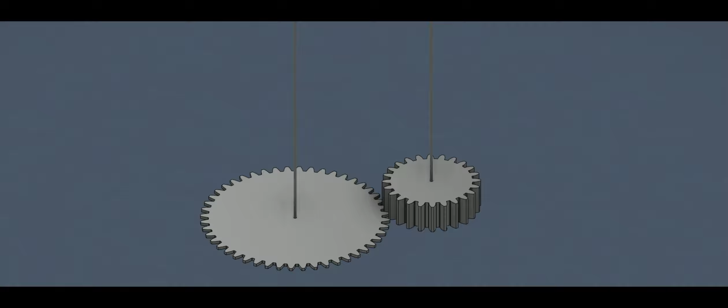Because of their straight teeth, spur gears are some of the easiest gears to model and manufacture. They're great for learning about gears. They're the cheapest gear to produce, they work really well at low speeds, and they're beginner friendly. But the way their teeth are designed makes it easy for them to slip and lose grip with each other. When they reach really high speeds, they get really noisy and start vibrating.

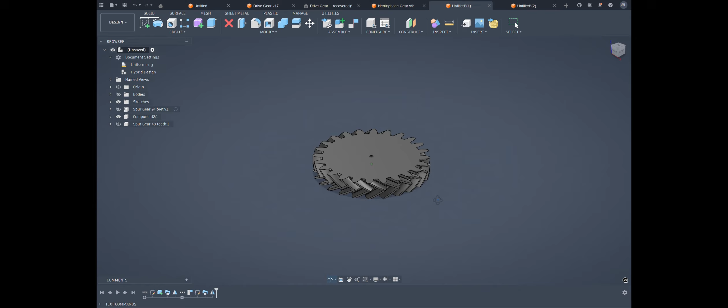An upgrade to the spur gear is the herringbone gear, which is basically two helical gears mirroring each other. Their teeth engage gradually, so they operate really smooth. They have a really high load capacity, and because of their V shape, that prevents the teeth of these gears from sliding out of each other's grip. But they're a little bit more advanced to design.

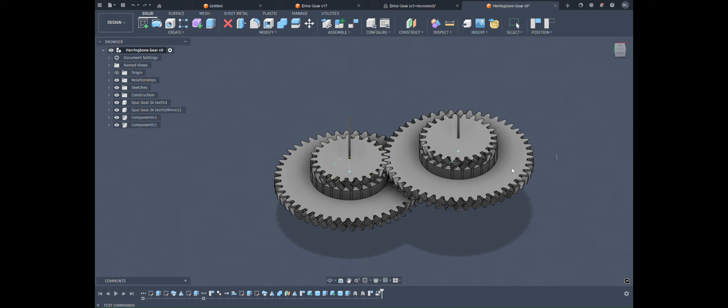In this video, we'll modify the spur gear and turn it into a herringbone gear, making it more efficient and better to use in a hand-cranked phone charger. We'll also add some spacing to prevent the gears from rubbing against each other.

Let's start by creating a new hybrid design and then adding a spur gear. As you can see, I've already added the spur gear command to the Create panel in the Solid tab of the Design workspace. But if you haven't, click Utilities, Add-ins, Scripts and Add-ins, and hit the play button next to spur gear. Leave all the settings as is. We're about to create a spur gear with 24 teeth.

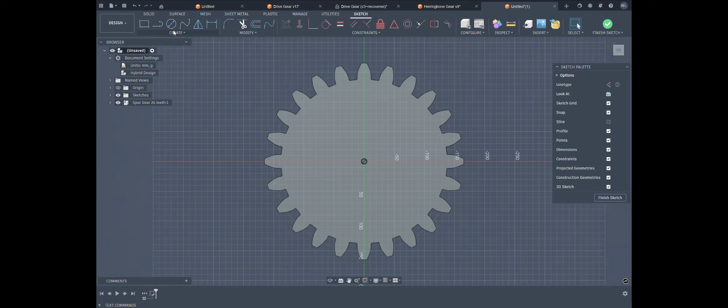Next, create a sketch on the top surface of the gear. Making sure that 3D sketch is checked, select the line tool, and from the center of the gear, draw a line that goes up vertically, perpendicular to the surface of the gear. I'm setting the length of this line to 25 millimeters. We'll use this line later for the sweep tool.

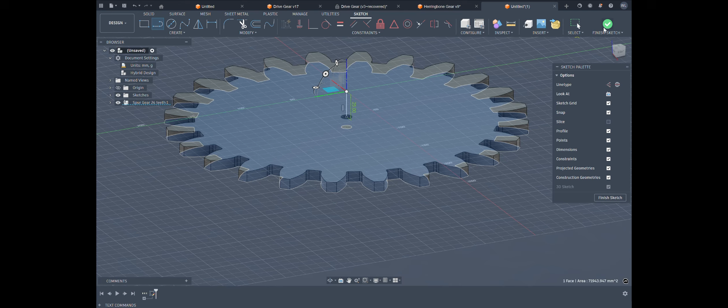You can now click Finish Sketch and make the spur gear component invisible. We don't need it anymore. We only needed it to create the outline profile for the spur gear, which got generated when we created a sketch on the top surface.

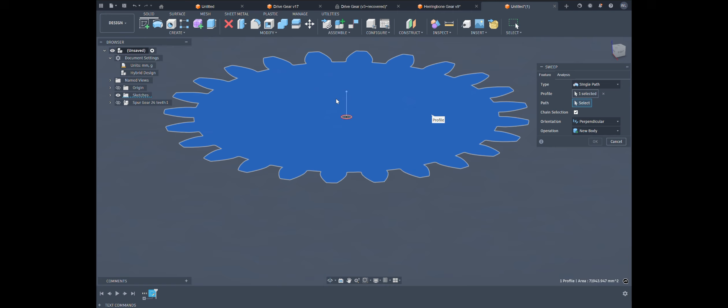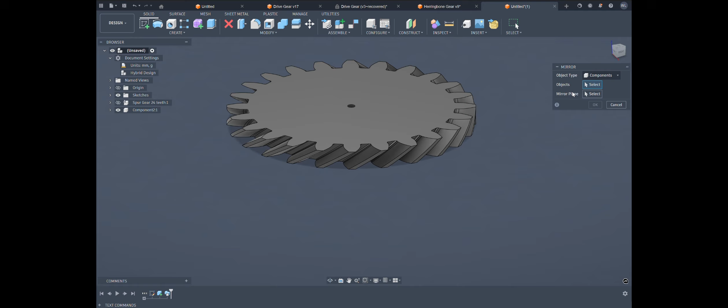Now use this profile to create a sweep. Use the vertical line you created as the path that the sweep will follow. Set the twist angle to 15 degrees. And you've just created a helical gear. Before clicking OK, make sure you set this object as a new component. To turn this into a herringbone gear, just mirror this body using its top surface, and make sure you set the operation to join.

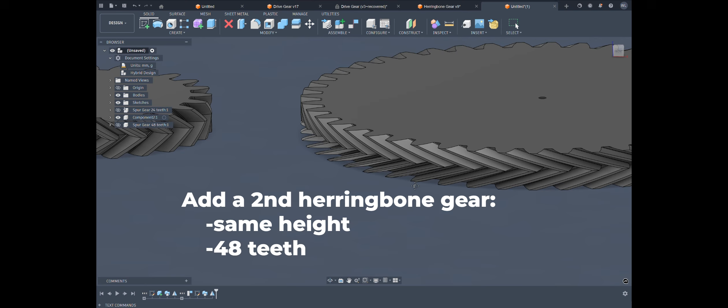I've repeated this process to create a second herringbone gear that has 48 teeth. Pause the video and do the same. What you see on the screen now are two herringbone gears that both have a twist angle of 15 degrees, but their teeth don't match, and that's going to be a problem when it's time to align their teeth.

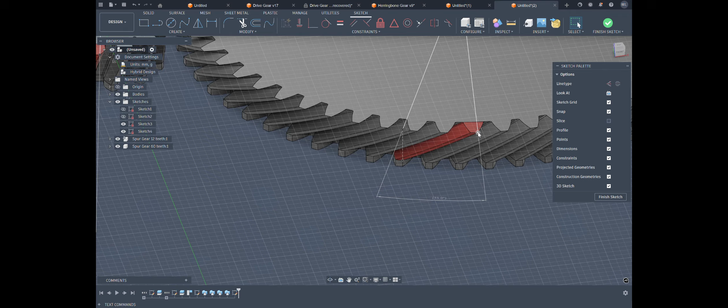You'll notice the one with the larger circumference, it looks like its teeth are more stretched out. That's because, although both gears twist at 15 degrees, on the one with the larger circumference, the teeth on the outside have a longer distance to travel, which makes them appear more horizontal.

For my smaller gear, the height of half the herringbone gear is 25. That's the length of the sweep path. The twist angle value I'm entering is 15, and the number of teeth is 24. I'll take this value that's being outputted and copy it. And then in Fusion, I'll find the sweep operation for this small gear, edit it, and paste in the twist angle value.

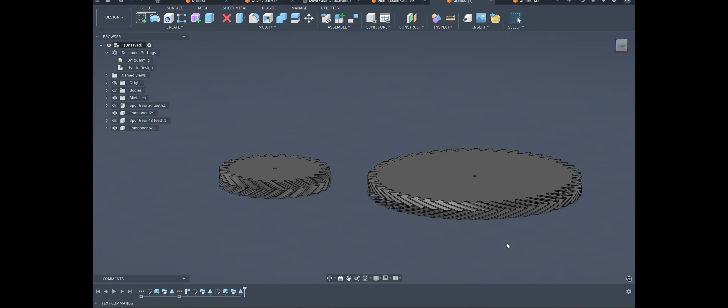For the bigger gear, the height is also 25. The twist angle is also 15, and the number of teeth is 48. I'll copy this output and edit the sweep operation done on this gear, pasting in the new value.

Now that we know how to make matching herringbone gears, let's make a herringbone gear set and add a cylindrical spacer in between to prevent the gears from rubbing against each other. With the small gear being the active component, I'm going to create a sketch on its top surface.

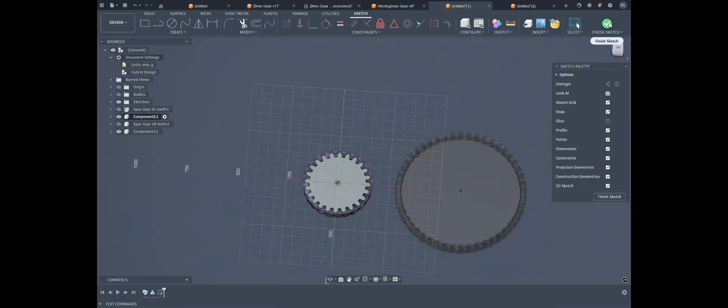I want the cylindrical spacer to be the same size as the circumference of this gear while looking at it from the top. So to create that circle that I'll use to extrude to create the spacer, I'm going to project this entire gear's outline on the plane where the sketch is. Then I'll click Finish Sketch and extrude this circle up. I need this entire circular outline. Exclude the hole in the middle and extrude this circle up 50 millimeters.

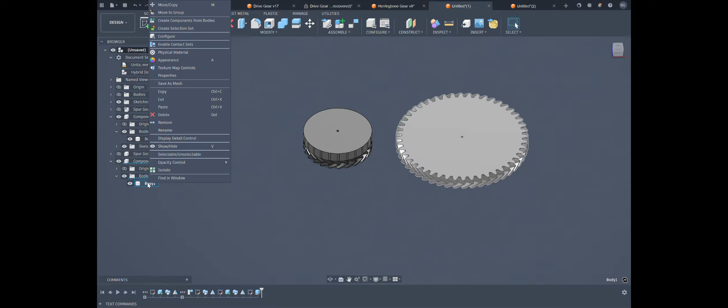On the top of this spacer, I want a copy of the big gear. What I'll need to do is find this body of the big gear and copy it, and then find the component with the small gear, find that bodies folder, and paste the big gear's body into the bodies folder where the small gear is, so that both of those bodies will exist in the same component, so they'll move together.

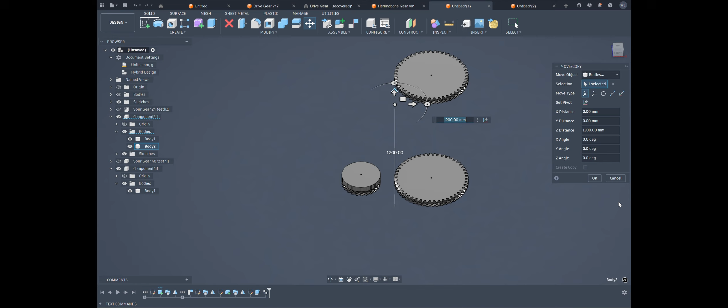Then I'll move this body up toward the sky so I can see the bottom of it. So I'll be able to align the bottom center of the big gear with the top center of the small gear using the Align tool.

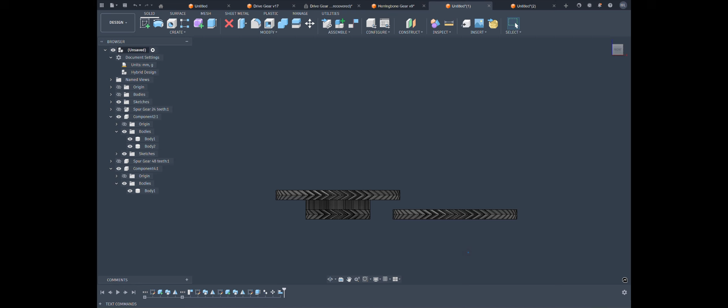Now take a look at the big gear and the little gear, more specifically the direction of their teeth. In order for herringbone gears to be able to move each other, their teeth have to be facing opposite directions. One's teeth have to be pointing clockwise, the other one's teeth have to be pointing counterclockwise. Otherwise, their teeth will run into each other and they won't align.

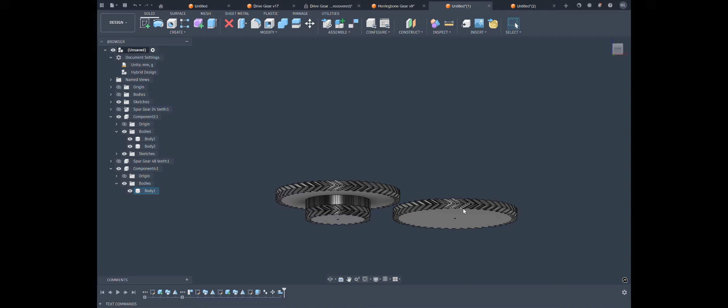There are a few ways you could set the teeth on the other gear to face the opposite direction. You could either flip the gear upside down, or you could mirror the gear like I'm doing in the video, or more easily, you could edit the sweep operation and change the value of the twist angle from being positive to being negative, or vice versa.

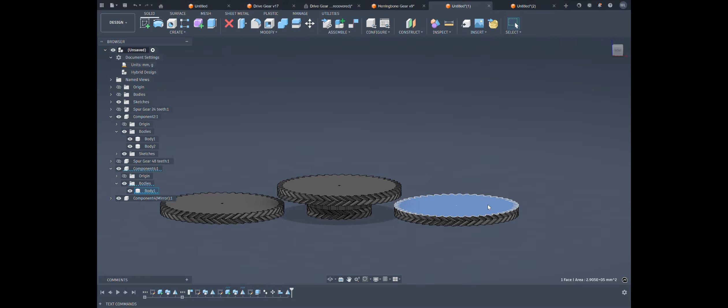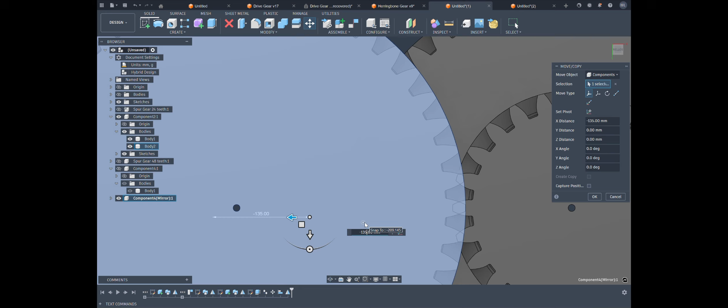Now I'm toggling the visibility of the gear component with teeth facing the wrong direction. I'm going to make that one invisible. After creating this mirror, I'll slide the gears close to each other. And then, like before, create cylinders at their centers as new components that will be grounded to their parent, so I can create revolute joints between the gears and the cylinders.

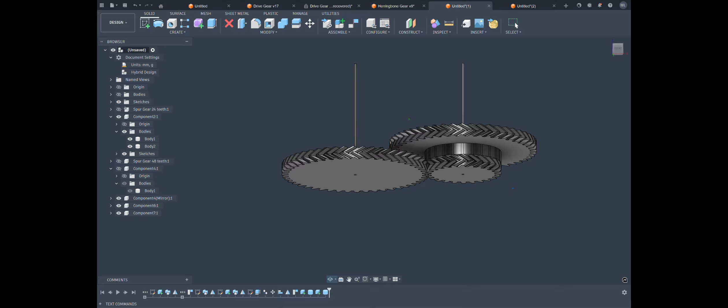With the grounded cylinder poles in place, I can now create revolute joints between the gears and the poles. I'll be using an as-built joint for this first revolute joint, which requires me to select the two components that have already been built together and the one location where both of their snapping points will meet.

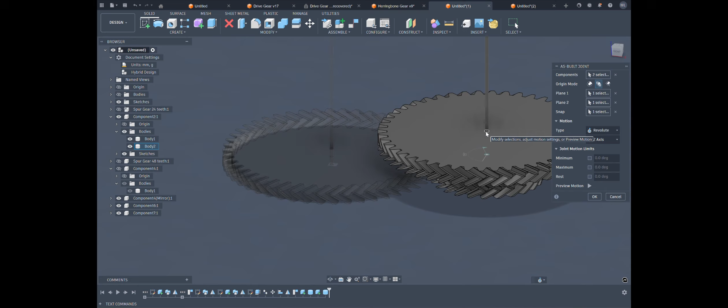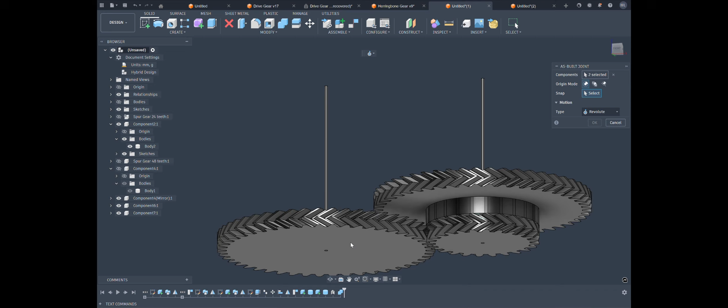Once both of these gears are together and aligned, I can combine their bodies. I'll do the same for the other gear as well. Create an as-built joint. And it looks like as I'm trying to drag the gears and make them rotate, they're not moving. And that's because I forgot to ground the poles. So that's what I'm doing now, grounding the poles.

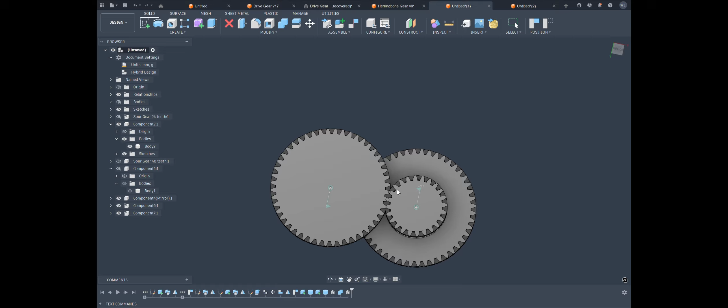So now that the gears are free to move and can rotate, I'm going to align their teeth to prepare them for the motion link. The first joint I selected is inside the big gear, which has 48 teeth and is twice the size as the small gear. So when the first gear makes 1/2 of a rotation, the second gear, the smaller one, should make 1 full rotation. In other words, when the first gear turns 180 degrees, the second gear, the smaller one, should turn 360 degrees in the opposite direction.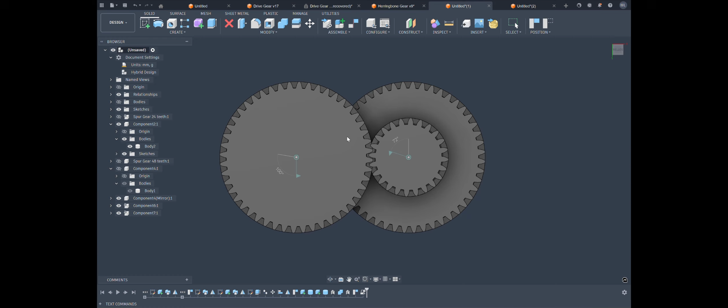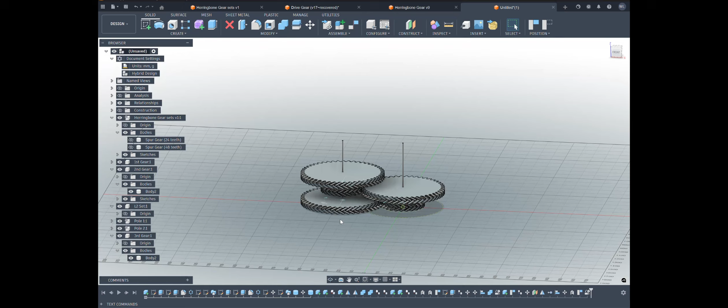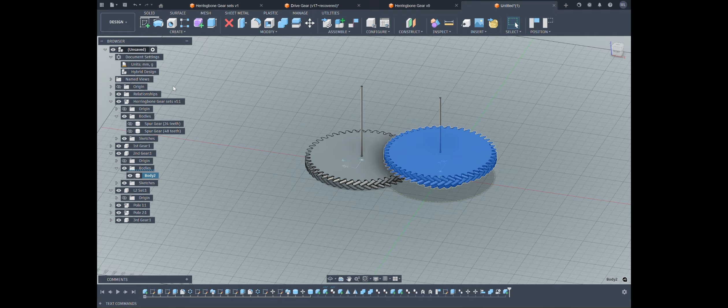Now I'm doing a section analysis just to see that my teeth align all the way through from top to bottom. Next, I'm going to create a second gear set with teeth facing the opposite direction. Create an empty component, which will later contain the body of the new gear set. In the browser, find the body of the original gear set and right-click it and copy it. Then right-click and paste the gear body into the new empty component.

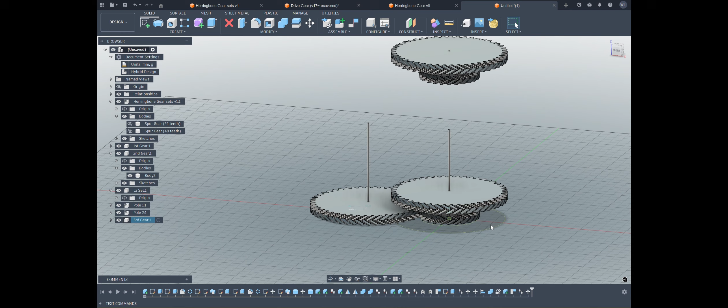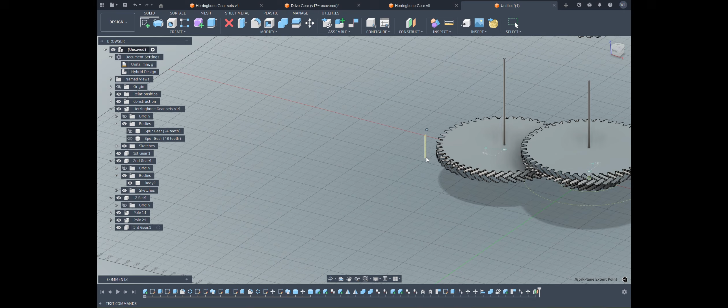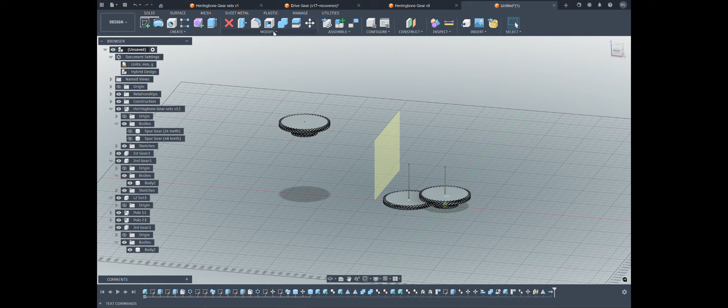The new gear's teeth are facing the wrong direction. I'm going to mirror this gear set to create a copy with teeth facing the correct way. With the second version generated, I'll find the body of the backwards one in the browser and remove it. Now I can align the center of the new gear set to the pole it will revolve around.

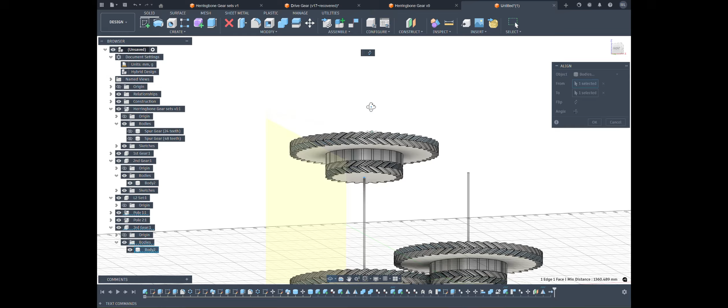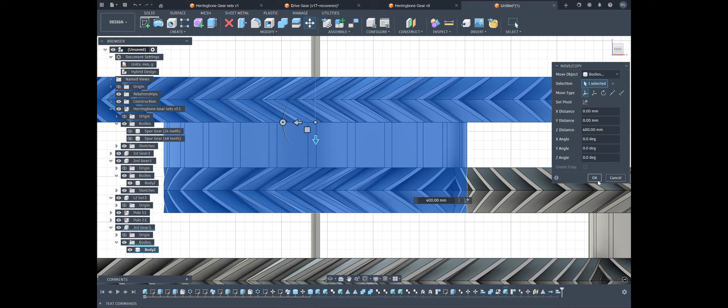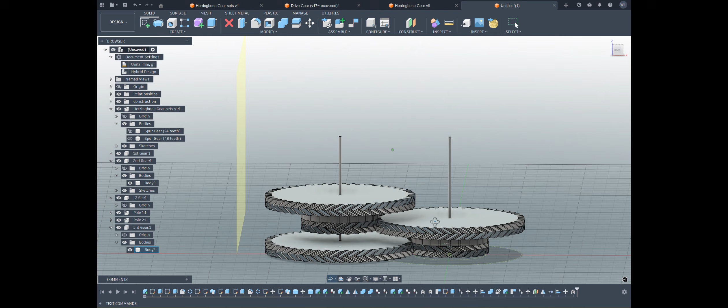Using the Move tool, I'll move the new gear set downwards until its teeth align with the gear it will be in contact with. With the gear set in place, I'll create an as-built joint between the pole and the gear set. Next, I'll create a motion link between this new joint and the joint of the gear in contact.

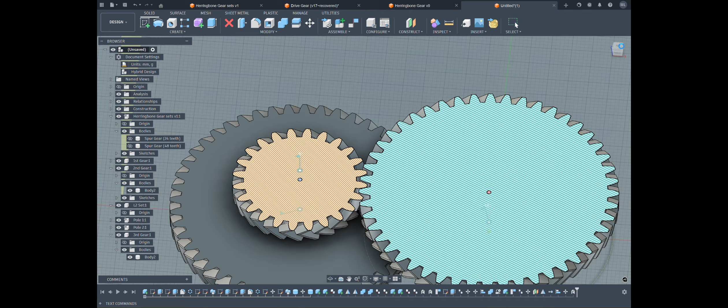Create a section analysis to make the teeth visible. With the teeth visible, you can now align them to prepare them for the motion link. Now with the teeth aligned, create a new motion link. As shown in this video, I'm clicking the joint inside the smaller gear first. When this one turns 360 degrees, the gear it's in contact with should only turn 180 degrees.

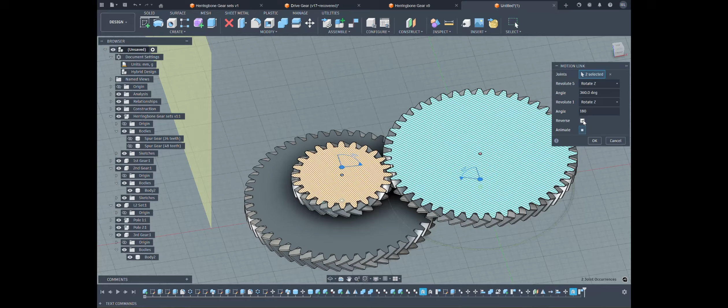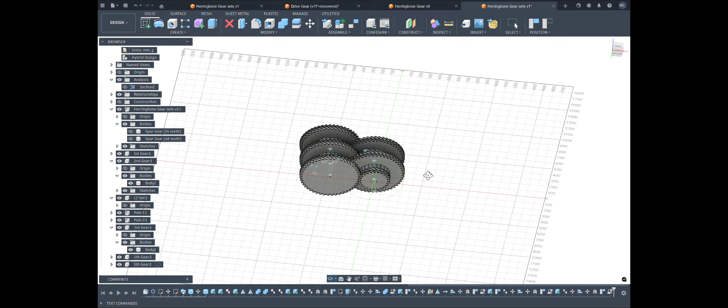And that's pretty much a wrap on how to create herringbone gears, which are much stronger than spur gears, and also adding spacers to prevent them from rubbing against each other. See if you can scale up this project a little bit and add more herringbone gears to the back of the ones that I've already added.